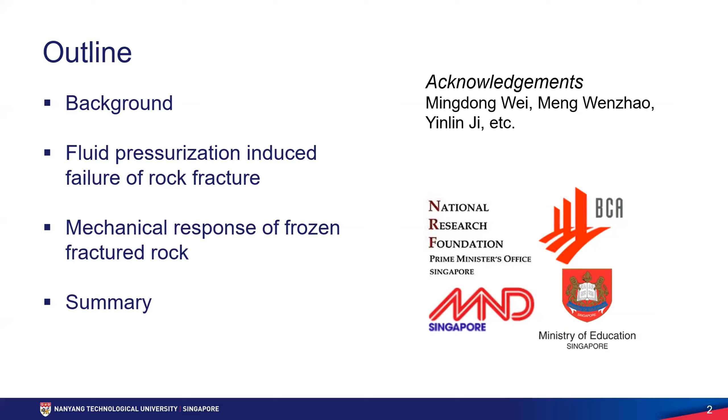These works are carried out by my research staff and PhD students in my group at NTU Singapore, and supported by, as you can see, various government agencies in Singapore, such as the National Research Foundation and the Ministry of Education.

In recent years, we can see frequent extreme weather due to climate change. You may remember the Zhengzhou flood this summer. 12 people died after rainfall flooded underground railway tunnels, leaving the passengers trapped inside the rising water. And you may also experience extremely cold winters at freezing temperatures. On the right, you can see a frozen park in Texas in the United States.

From the two examples, I want to talk about the impact of extreme conditions on the mechanical behaviors of fractured rocks. I think very few people have been looking into this topic. The reason is climate change: we can see the change of weather, change of temperature, but very little evidence showing the change in the rock mass. But if you look at water, water can be the medium linking up the change of the rock mass with the temperature change or climate change.

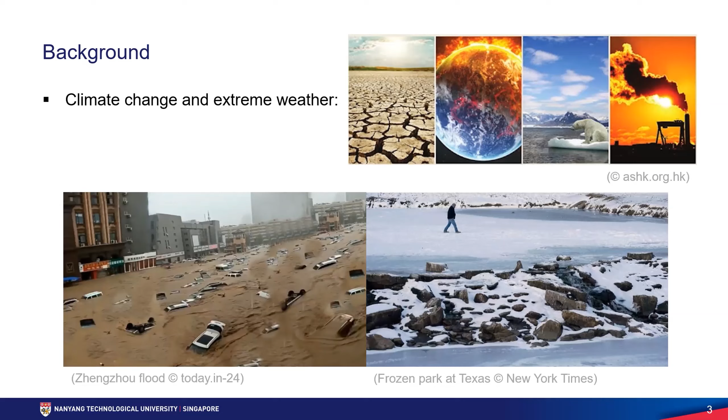So the first example is about the stability of rock fractures with abnormally high fluid pressure inside the rock. We know in the hydrostatic condition, the fluid pressure increases linearly with depth. However, groundwater flow and rainwater downflow can make the fluid overpressurized locally. The fluid pressure is close to the principal stresses, as you can see here, which promotes the instability of rock slopes and water inrush into tunnels.

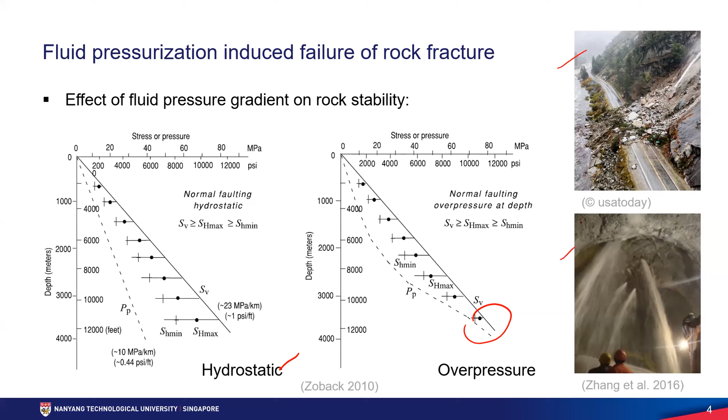Traditionally, we use the Mohr-Coulomb model to describe fluid pressurization on rock fractures. When you increase the fluid pressure, it decreases the effective normal stress and drives the circle from the right towards the left. The model assumes uniform pressure distribution on the fracture. But sometimes, if you have heavy rains and high pressure on the ground, the fluid pressure may suddenly increase, making the fluid pressure non-uniform on the fracture.

So in this case, how can we consider the instability of the fractures if the water pressure is not uniform inside the fracture? So we designed the shear flow setup. Here we have a rock core sample. We cut the sample with a saw-cut fracture 30 degrees to the core axis. We apply the normal stress and the shear stress on the inclined plane of the fracture.

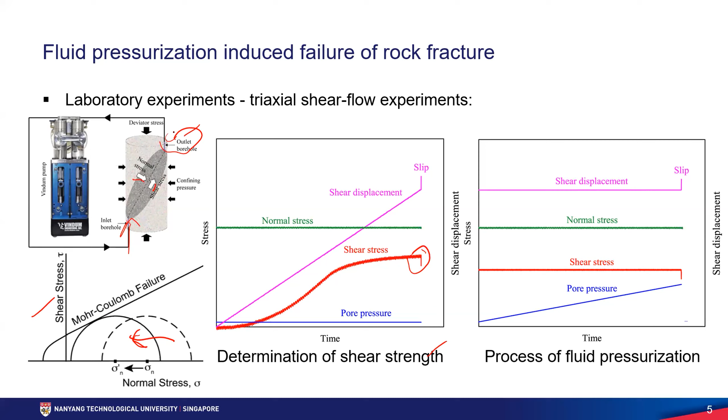In this test, we first determine the shear strength. We induce the slip, then we measure the maximum shear stress as the strength. After that, we decrease the shear stress to 80% of the shear strength to simulate the critical stress state of the fracture. Then we inject fluid into the fracture through the inlet borehole and monitor the pressure on the other side of the fracture. So we will see the fluid pressure distribution along the fracture, either uniform or non-uniform.

Next, let's look at the results. Here we summarize the results. You see the dashed line. This is the failure envelope of the Mohr-Coulomb model. When the effective normal stress is small and the injection rate is low, we can see the failure points are almost on the failure envelope. That is what we learned about the Mohr-Coulomb model.

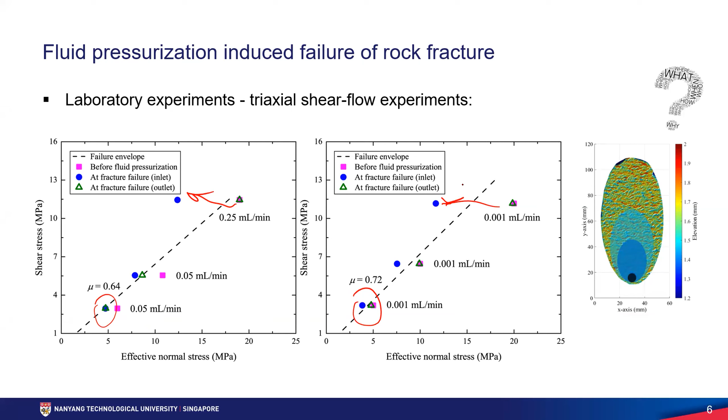However, if the effective normal stress is very large and the injection rate is very high, the failure point can overshoot the failure envelope, showing that the Mohr-Coulomb model is not valid, because in this case the fluid pressure is non-uniform on the fracture, so this cannot fulfill the assumption of the model. So how can we deal with non-uniform fluid pressure on the fracture, and consider this case in engineering applications?

First, we need to understand the real fluid pressure inside the fracture. We cannot see it because this test is in a Hoek cell. So we use COMSOL software to visualize the fluid pressure distribution on the rock fractures under low and high effective normal stress. For the left case, you see the fluid pressure is nearly uniform, with a very small difference.

In this case, we derived the fluid pressure along the axis of the fracture, this line, which is very close to the fluid pressure predicted by the Mohr-Coulomb model. This is fluid pressure uniform on the fracture. On the right, in the other case, the fluid pressure is very non-uniform on the fracture, and the pressure is not equal to that predicted by the Mohr-Coulomb model. So from those two cases, we can see when the fluid pressure is not uniform on the fracture, the Mohr-Coulomb model cannot be used anymore.

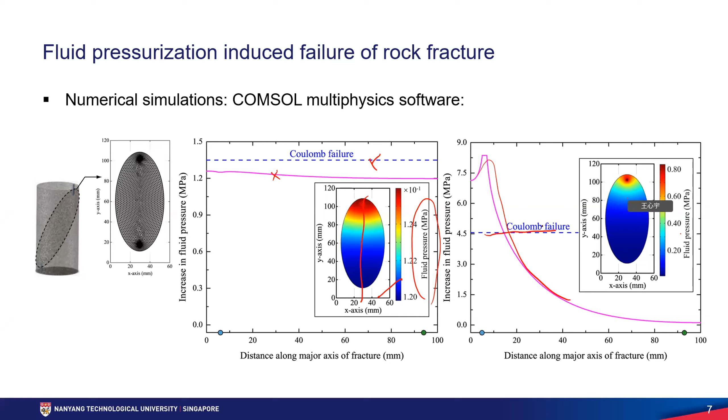So how can we consider the influence on the engineering case? Here we estimate the factor of safety for three cases. You see the three lines. One is this line, the green color. This is a uniform fluid pressure distribution on the fracture. The second case, the red line here, is the linear fluid pressure distribution. And this blue line is a non-uniform or non-linear fluid pressure distribution. So we have three types of fluid pressure distribution on the fracture.

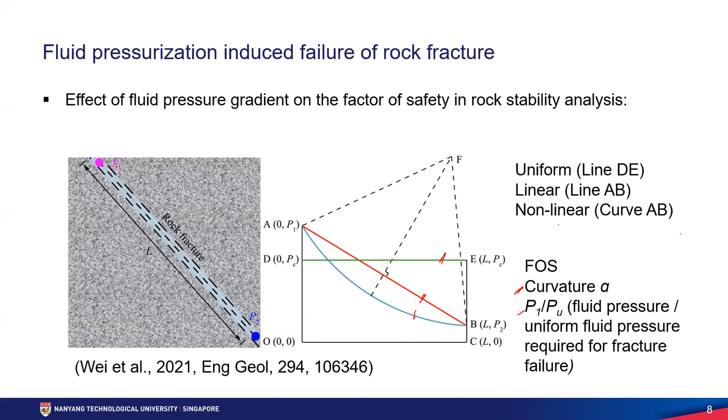Then we try to derive the factor of safety to see the impact of the fluid pressure distribution on the factor of safety. Here we define the curvature for the three cases, as well as P1 and PU, which is the fluid pressure, as well as a uniform pressure required for fracture failure. And these are the results. For a constant initial fluid pressure, the factor of safety increases as the pressure ratio P1 over PU increases and the curvature alpha decreases.

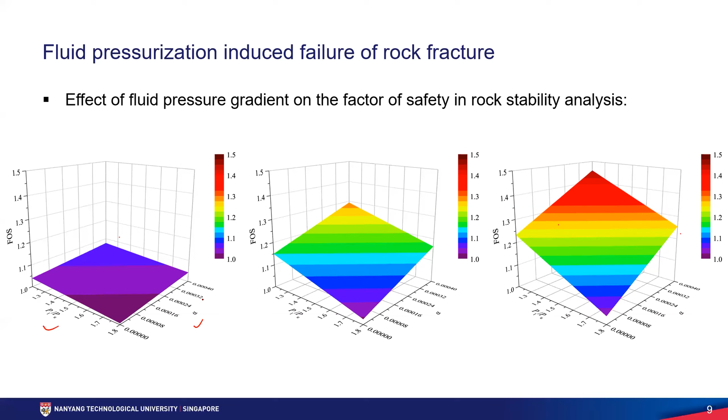Here are three cases representing different initial factors of safety. For all the cases, a more significant non-uniform fluid pressure can result in a higher factor of safety. So in your engineering applications, if you see the fluid pressure is very high on one side of the fracture, you cannot use a traditional factor of safety to predict the stability of the rock. You should consider that the fluid pressure enlarges the factor of safety in this case. Okay, so this is the first case.

Second, let's look at the mechanical response of a frozen fractured rock. This image is very common in a cold area. If you go out in the winter months in the north of China, you will see this kind of rock mass with a closed fracture, right? You can identify many features from this image: the gouge-filled fracture, the ice-filled fracture, the fracture network, fracture spacing. Combining all the features together, it's very complicated to predict the mechanical behaviors of the rock mass.

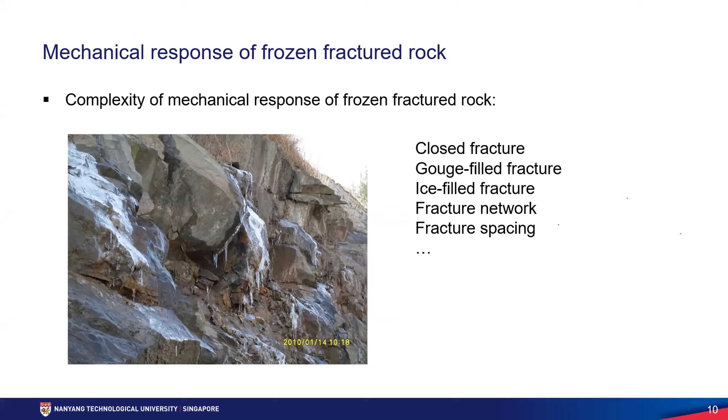So in our study, we try to combine many approaches, such as laboratory experiments, numerical simulation, and machine learning, to predict the mechanical behaviors of the fractured frozen rock. We first conduct the uniaxial compression test, a very simple test, on the intact rock sample and the frozen rock sample with ice-filled fracture. Those fractures are filled with ice. We put it into a fridge, then take it out for the uniaxial compression test, and we use those test results to validate the PFC model.

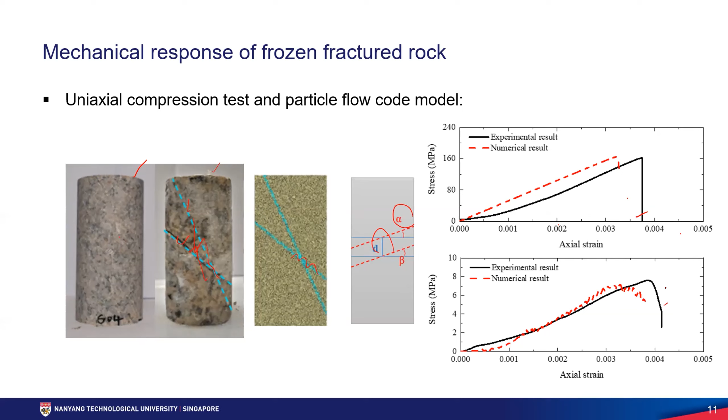We create the PFC model with rock materials at 0 degree temperature, as well as ice fractures. We consider different parameters: the inclination of the ice layer, the spacing of the fractures, and other parameters. First, we use experimental results to validate the numerical model. We performed about 200 numerical simulations. Next, we use those results to train and validate the machine learning model.

We use a random forest model to predict the mechanical behaviors of the frozen fractured rock. We tried many machine learning algorithms, such as neural networks and support vector machines, and finally found that the random forest is the best to predict the mechanical behaviors of the fracture network.

Here we use 5 parameters as the input: persistence factor, inclination angle of the ice layer, the thickness of the ice layer, the fracture number, fracture spacing. The persistence factor is defined as the sum of the fracture trace over the total length of the scanline. We have these parameters as inputs, and use uniaxial compressive strength and Young's modulus as the outputs. This is the flowchart for the random forest model.

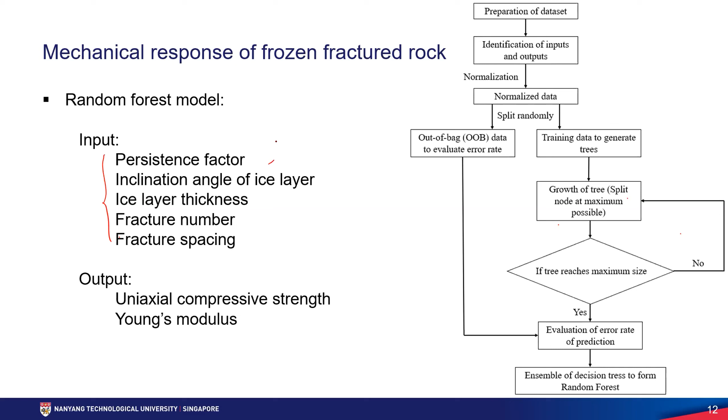We have 200 numerical simulation results, using 75% to train the model and 25% to validate it. These results show the comparison between the random forest prediction and the PFC simulation results in terms of uniaxial compressive strength and Young's modulus. The prediction results are quite good based on the R square, root mean square error, and mean absolute percentage errors.

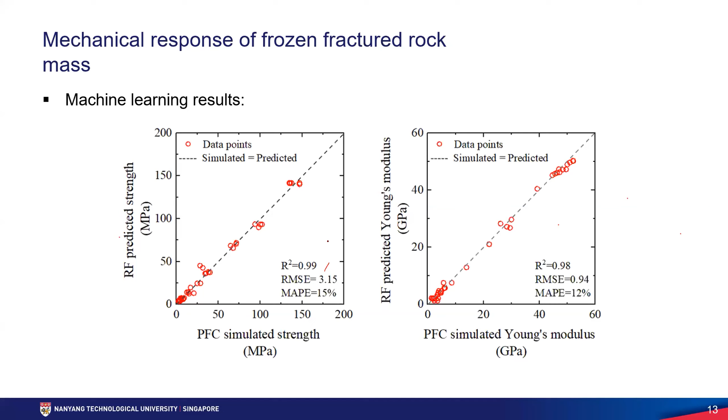We also compare our prediction and simulation results with existing models in the literature, such as the Ramamurthy model, an empirical model to predict the strength of the rock, expressed in these equations. There is good agreement between this model and our machine learning model. Finally, we perform the sensitivity analysis. We find that the persistence factor is very important in the prediction of Young's modulus, and the inclination angle is critical in the prediction of the uniaxial compressive strength.

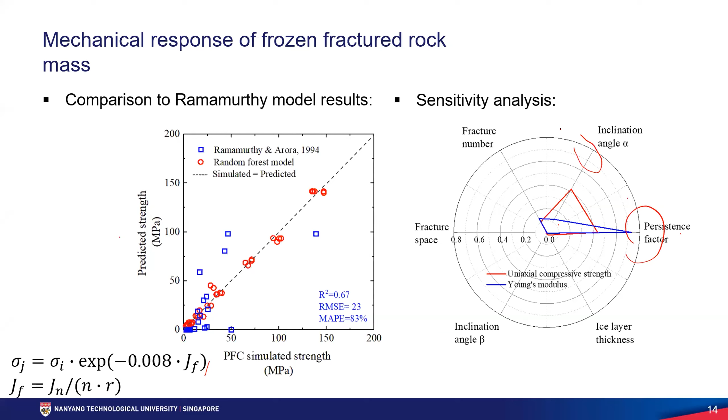So those are the topics I want to share with you. This is just a small effort to address rock mass behaviors modified by climate change in terms of high water and low temperature. In the future, we will probably see more factors that affect rock behaviors. The influence on the rock mass could be invisible at the current stage, because we see the temperature change and the rainwater, but we cannot see the effects on rock mass. But water can be a medium linking climate change and rock mass behaviors. That is a point we could consider for fundamental studies as well as engineering applications.